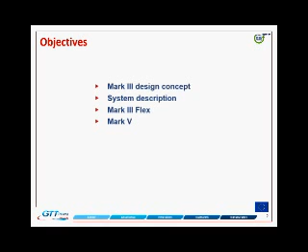A feature here, which will become more apparent in a minute, is the material of this primary membrane, often referred to as a waffle plate. Here's a piece of the primary membrane. In the Mark III system, the primary membrane is made of a particular grade of stainless steel, 304L, and you can see it has these folds or corrugations in it. You can probably guess the reason for those.

It's because when you cool that down to minus 160 degrees, it's going to contract. So to absorb that thermal contraction, the sheets of stainless steel are folded in this particular way, so that when we cool it down, all of the contraction is absorbed by these folds. The actual stress on the material itself is very low.

We've already seen that the membrane system has to have a secondary barrier. In the Mark III system, the secondary barrier is made not of stainless steel, but of a different material called triplex. Triplex is itself a kind of sandwich made up of aluminium foil in the middle, a very thin sheet, with glass cloth on the top and bottom. This is called triplex, and it acts as a secondary barrier. I'll show you where it's located in a moment.

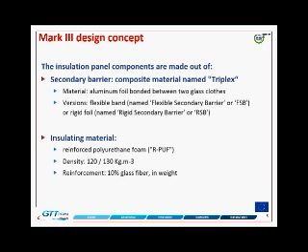The insulating material is reinforced polyurethane foam, often referred to as RPUF because it's easier to say. Now, because of the stresses, flexing and stressing on the hull we talked about earlier, if we just had blocks of polyurethane foam there's a good chance they'd crack as the hull flexes and stretches. So it's reinforced with glass fibre to prevent it from cracking.

This is a typical example of how it's put together. On top here is a piece of the insulation. The primary membrane would fit on top here, which I'll show more clearly in a moment. We have some polyurethane foam, then the grey layer is the secondary barrier, triplex, then more foam, and then a plywood sheet on top with stainless steel strips attached, which allows us to weld the stainless steel primary membrane onto that.

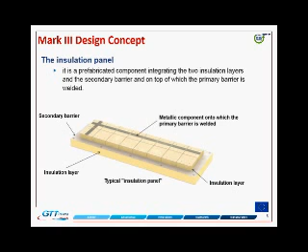Okay, I'm going to explain that in a bit more detail with some nice diagrams in just a moment.

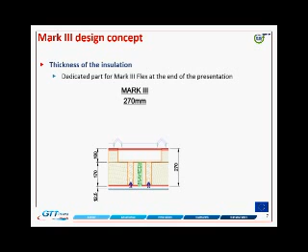Dimensionally, the thickness of this insulation system is about 270 millimeters. So here's your inner hull, here's the secondary insulation, which is about 170 millimeters thick, here's the primary insulation, about 100 millimeters thick, and then we've got the triplex secondary barrier at this point and the primary membrane on the top here.

With all of these containment systems, one of the key things from a manufacturing point of view is to make them as uniform as possible. We want as many standardized components as possible, because that keeps the cost down in terms of manufacturing and makes installation easier. If you're installing multiples of the same thing, it's easier to train people. If you have many different components to install, it becomes more difficult and more complex and expensive to install. So as much as possible, we minimize the elements that make up this system.

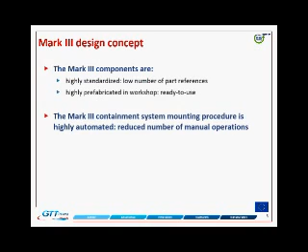And that's what I'm going to show you now, some of those elements. So the panels, which are used in what's called the flat wall area, all these flat surfaces in this tank, we refer to as the flat wall area, and they're made up of these panels. We can see the panel, you saw that just now.

Let's split it apart. So each panel is a sandwich, which has a plywood base, polyurethane foam, secondary insulation, 170 millimeters thick, a sheet of triplex, that's our secondary barrier in case the primary fails. Then we've got a thinner 100 mil thick piece of primary insulation, and once again a piece of plywood board on the top of that, which allows us to attach the primary membrane onto it.

So all of those components are bonded together with glue in a factory where it's manufactured, held under a certain pressure, certain temperature and humidity for a certain number of hours, and that is a panel. We use multiples of those panels in all of the flat areas in the tank.

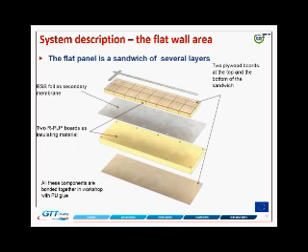So those are the elements there. In this diagram you can see these are all the flat panels. You see them on the bottom of the tank, on the transverse bulkhead at the fore and aft end of the tank, and on the chamfer wall here. They're all the same. I've forgotten the exact size of them now, doesn't matter. But those are the flat panels, okay? Get the idea?

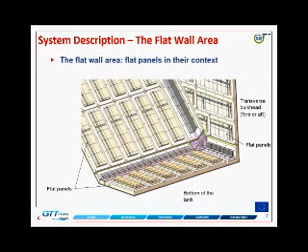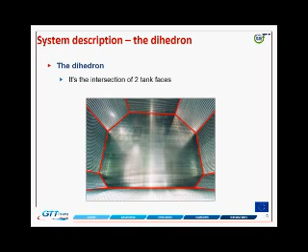Where we come to the joining between two of these flat surfaces, we refer to this as the dihedron. So we have some 90-degree angles here, and we have these angles on the chamfers. It depends on the exact design of the vessel, but it could be 135 degrees, which is pretty typical. But they can be any angle you like, you can make them anything you want, or they could be just rectangular. So this is the dihedron, this is where the corners are located.

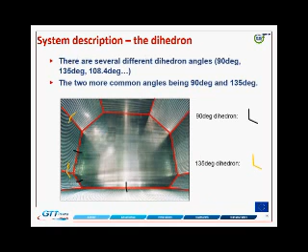So these panels are slightly different now, and I can split one of those apart so you can see how it's made up. Here you can see that we have a secondary insulation here, a plywood base behind there, and then we've got our triplex here. These are made up of two elements joined together, and of course there's a bit of a gap between there. So we have this piece of secondary membrane, which is then bonded onto there to cover the joint, and then we have the primary part, the primary insulation, which is slightly different. Instead of being lumps of polyurethane foam, it's got to be a little bit stronger, so we use blocks of plywood with 6mm thick stainless steel plates joining them together. Here you can see one of them. Okay, so that's what goes together in this bit here.

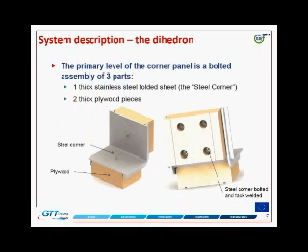So when we put it all together, those are the dihedrons which run along here and along here. Wherever we get two flat surfaces coming together, we have one of those.

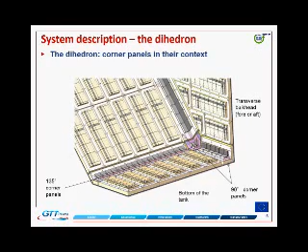Now, in these little corner pieces here, we actually have the joining of three flat surfaces together, and this is called a trihedron. Same sort of idea, but slightly different construction. So now there are 1, 2, 3 faces to this, and if we split it apart, again, it's not too difficult to see.

We've got polyurethane foam for the secondary barrier. We have 3 separate pieces of triplex here, and another piece folded to go across all of those. Because of the way that fold is, you'd end up with a sharp point, so there's a bit cut out, and a small scab stuck over it to complete the seal. Then we've got more pieces with plywood blocks and a stainless steel plate to give additional strength in the corner.

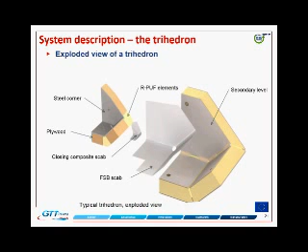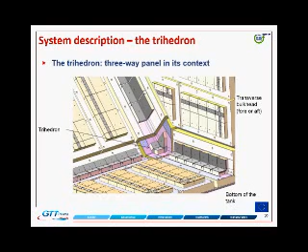That's where they're located, where the three faces join together. So those are the main components of that system. Now, when we put it together, there's a bit of a problem because we have gaps between the panels, and the secondary membrane itself has holes and gaps in it, so we've got to fill all those in as well.

So at the construction stage, when all of these elements are in place, we run strips of triplex across all of these joints, and they're all glued in place. As much as possible, all the long lengths are done by automatic machines. Using machines minimizes human error and increases the consistency of the quality. In the corners and areas where the machines can't get, people have to do that, and the guys who do the manual bonding in the corners are very highly trained. They have to test all of these parts once they've been bonded down. They go around with a vacuum box, and there are several tests carried out.

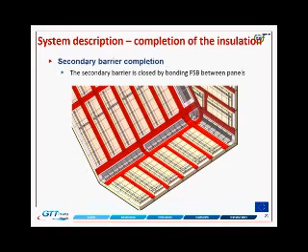If we go back a touch here, once we've glued all of these in place, there are still some gaps in the insulation between here, so we've got to fill in all of these gaps now to complete the insulation. That's where this bit comes in, referred to as a top bridge pad, and it fits in between all of those panels. We fit them all in so that we end up with a smooth surface. All the insulation is completed, and all we have left to do now is install the primary membrane onto the insulation system. So those are the elements that make up the system.

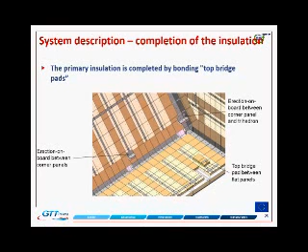So we've got our primary membrane, and then the insulation system beneath it. Part of that insulation system contains the triplex secondary membrane, and then we're in contact with the inner hull. The method of attaching those panels onto the hull, in this system, is physically bonded. They are glued onto the hull.

To glue them onto the hull, they use ropes of mastic, which do two things. One is to physically bond it to the hull, and the second is to spread the load onto the inner hull, because when you build a ship and great big blocks of the hull are put together, the surface of the steel is not nice and smooth and flat like that tabletop - it's a bit up and down, undulating. So the thickness of the mastic ropes underneath those panels varies to absorb the gap depending on the undulations of the steelwork. It fills the gap, as it were, and also transfers the load onto the hull as well as bonding it.

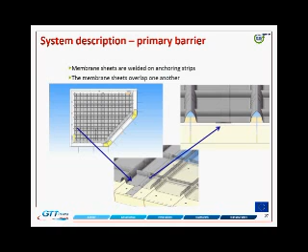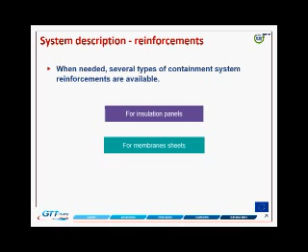Now, we mentioned earlier about reinforcements. For this system, you can reinforce the insulation panels, and or we can have some reinforcements for the actual primary membrane itself, depending on what we need for this particular vessel, given what the vessel's going to do and where she's going to work.

So as far as the insulation system is concerned, I mentioned the mastic ropes that fit underneath. It's a bit hard to make them out, but these are the mastic ropes underneath, so the inner hull would be here. For the insulation, what we can do is reduce the pitch at which these are located, so the more of them we put in, the greater the load bearing and the more reinforcement we've created.

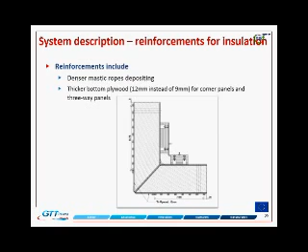As far as the primary membrane is concerned, there are two ways of reinforcing it. The corrugations, the folds in the primary membrane, can be strengthened by creating little ribs within them, giving greater structural strength to resist the motion of liquid moving around in the tank. If we need even more reinforcement, we can locate small plywood wedges underneath those corrugations, giving them greater resistance to pressures created by the liquid moving in the tank. So those are a couple of ways we can reinforce that system.

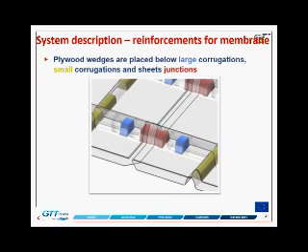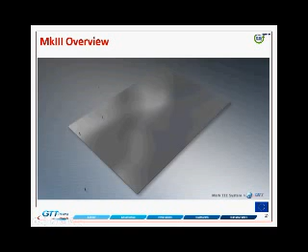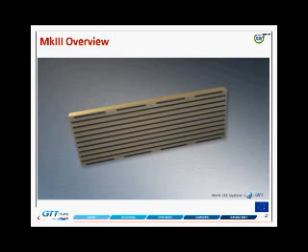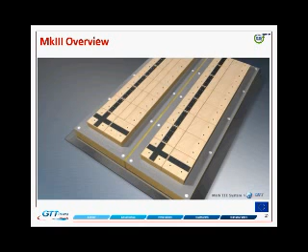Now, if this works, you will see a brief animation showing the way in which these come together. Here's the inner hull. There are some studs located on the hull to allow us to locate the flat panel. Here's the mastic ropes that go on the back of those panels, and there they go down onto the inner hull. We secure those down, then fill in the gap between. There's the triplex to close over the gap, so that completes our secondary membrane, secondary barrier. And here we're showing the reinforcements being put in, the reinforced wedges as well, and that would complete the membrane system.

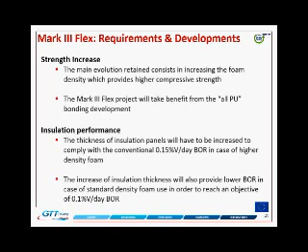So the way it worked out is they increased the density of the foam to give it additional strength. But because we'd given it additional density, we had to make it thicker to give the same boil-off rate. That was the strength option, which nobody's taken up—nobody wanted to do that, it turned out. Having increased the thickness of the insulation, what we could do then is keep the same foam density, so it's no stronger but it's thicker, meaning the insulation performance is better. So the boil-off rate reduced from 0.15% per day maximum guaranteed—in practice lower—down to 0.1% per day, and this is the option being used on the Mark III vessels constructed in the last couple of years.

So just to clarify, I showed you this diagram earlier. It showed the dimensions, and I said the total was 270 millimeters thick, with the secondary about 170 millimeters thick and the primary 100. So what's happened here is, again to make things as simple as possible manufacturing-wise, we've kept this bit the same, so that's still 100 millimeters thick.

This bit has increased from 170 to 300 millimeters thick. So you've increased the thickness of the insulation and therefore improved the insulation properties of that system.

What's the weight you have per meter? The density of the foam used here is about 120 kilograms per cubic meter. If you wanted the other option that no one's taken, the density of this foam was increased to give greater strength, but that was again the reason for having to make it thicker to still give you that same 0.15% boil-off rate. I'm not sure what the increased density was going to be actually.

Nobody's opted for that choice. All the ship owners have opted for going for the same density of foam with increased thickness to reduce the boil-off from 0.15 down to 0.1% per day. It's giving them a better insulation performance.

But the whole build-up of the first barrier, the second barrier, all these constructions, do you have any working figure as weight, kilograms per square meter for this? So like the panels themselves? Yeah, for the whole construction. The whole tank, well, that's hard to say because it depends how big the tank is.

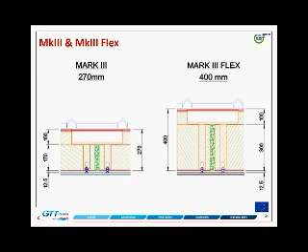So far we've talked about the Mark III design and this variation called the Mark III Flex. Now, there is something else that if you keep watching the newspapers and the shipping press, you will hear about in the not too distant future, but you heard it first here. There is a new design which GTT have developed, and it's currently going through approval processes with the classification societies now, and it's called the Mark V.

Now, your first question may be, what happened to Mark IV? Because we've jumped from Mark III to Mark V. Well, you may know, I didn't, but in Asian countries, the number 4 is an unlucky number, just like here in the West we consider 13 to be unlucky. So rather than upset anybody by naming it Mark IV, they diplomatically chose to call it Mark V. So that explains what happened to Mark IV.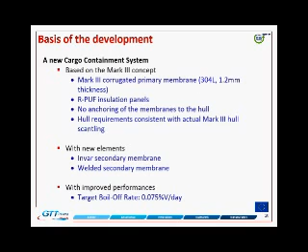Now, let's skip through to just look at the diagram. The original idea behind this was actually aimed at LNG fuel tanks, but it's now being developed for full-scale LNG carriers as well. Basically, we've taken the Mark III concept, so we've got the same polyurethane foam, the same stainless steel primary membrane, but the thing that's different here is we've replaced the triplex with a different material called Invar. So instead of gluing all of this triplex down, we're now going to use a metallic membrane which is welded.

So you could even argue that provides you with greater integrity because there's no bonding now, it's all welded. And so it's the same as the Mark III, except we've replaced the triplex with Invar.

Now, because Invar is going to shrink a little bit, there has to be some compensation for that. In this system, compensation is achieved with very small reverse corrugations in the Invar. It's a little bit like the stainless steel version, but with smaller corrugations, because Invar has a much smaller coefficient of thermal contraction than stainless steel does. So look out for that - you're going to start hearing more about it in the shipping press by the end of this year and into next year.

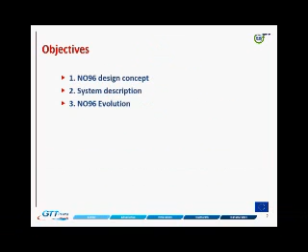Okay, so does that give you a reasonable idea about the Mark III system? So what I'm going to do now is give you a similar kind of overview, but for the NO system. I'll explain the NO system and at the end explain a recent development - if you keep watching the shipping press, you'll hear more about this development of the NO96 system.

So we'll start again with a nice picture. You've seen something like this already - this is the inside of the full-size LNG tank. Once again, you can make a fuel tank any shape you like, but here we have the standard prismatic shape and the pump tower at the aft end.

So the NO96 system follows the same basic principle of the membrane that we talked about earlier in the morning. But in this system, we have two metallic membranes, primary and secondary - in fact they're identical. And we have two layers of insulation, made up of plywood boxes filled with an insulating material. It's a little bit different.

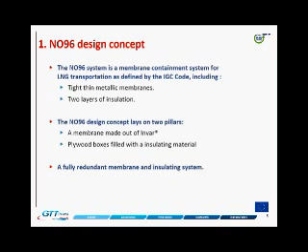Now, the primary and secondary membrane are made out of Invar, the same material I just mentioned in the Mark V. In this NO system, the Invar is laid out in strips or strakes, 500 millimeters wide, running the whole length of the tank. The edges of the Invar are just turned up a little bit at the edge, and I'm not sure if we see it in this presentation, but they're basically attached to the plywood boxes and welded together. There are no corrugations in this.

This is actually attached at the fore and aft end of the tank to the hull of the vessel, which is completely different to the Mark system. In the Mark system, there is no direct attachment of the membrane to the hull. But in the NO system, the membrane is directly attached to the hull, and I'll show you that in a moment.

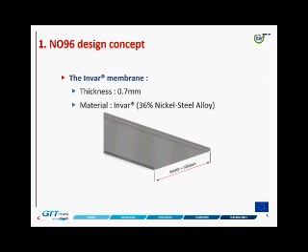So I mentioned that the insulating system here is very different. It was blocks of polyurethane foam in the Mark system, but in the NO system, it's made up of plywood boxes filled with an insulating material. Now these boxes, to make them strong, have internal bulkheads inside them, and they're filled with an insulating material.

Now up until about 2 or 3 years ago, the insulating material was always perlite. Perlite is like a volcanic rock - it's a bit like popcorn in the sense that the rock is heated up until it kind of explodes like popcorn, forms tiny little granules, and each granule has lots of little air holes within it. It's very light and has very good insulating properties, and it's coated with silicone, so if LNG or even water gets into it, it's not really affected. But that gave a boil-off rate of around about 0.15% per day.

So to reduce the boil-off rate in more recent years, they've replaced the perlite with glass wool, which is also very light and has slightly better insulating properties.

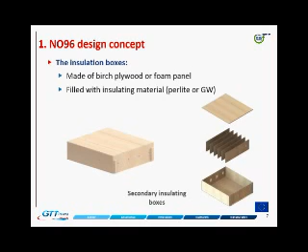So once again, we have a flat wall area, and then there's some other components that make up this system. Let's just have a quick look at the flat wall area. So a little bit like the Mark system, all these flat bits here we're referring to as a flat wall area. So here's how it looks.

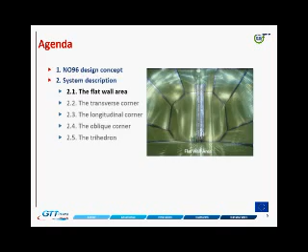If we took a cut through, here would be your inner hull, here is the secondary insulation box. You can see its internal division, and here it looks like it's filled with white perlite, but now it's glass wool. The box has a plywood lid, with little strips called tongues of invar, which slot into grooves in the top of the box, and that allows us to attach the strakes of invar, which are 500 millimeters wide, and they're all welded together to form a leak-tight secondary membrane.

When that's done, we pile more boxes on top again, and it's basically a repeat process — both the secondary and the primary are virtually identical. There's a few millimeters difference in the thickness of the secondary, but overall the total thickness of that insulating system is about 500 millimeters, more or less. So it's a little bit thicker than the Mark system. If you took two identical hull sizes and fitted one with the Mark system and one with the NO system, the one with the NO system has a slightly smaller cargo capacity.

You might notice that we have the internal bulkheads run in one direction on the secondary and the opposite direction on the primary. That's good for the structure, for the strength. Remember that all the weight of the liquid has to pass down through that structure and onto the inner hull, and once again we use mastic ropes here to transfer the load onto the inner hull. It's not very apparent, but those mastic ropes line up with all of those bulkheads inside the box, so all the load is transferred directly onto the inner hull.

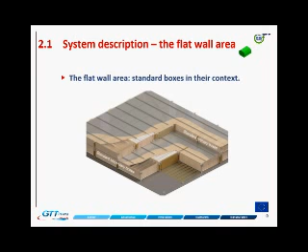So actually here you can see — this will be a very poor piece of steel work — but it gives you the impression that the steel of the inner hull is not flat. Here you can see how the mastic ropes fill the gap so that they're spreading the load from the box onto the inner hull.

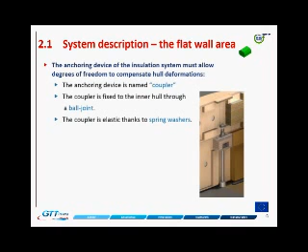So we talked about this earlier, about the pressure from the ballast water here. Because we're not going to glue the box onto the hull, we have to have some mechanism that both attaches the box to the hull but allows for that global and local deflection in the hull. The way we achieve that in the NO system is with this device called a coupler rod. The coupler rod starts at the bottom with a coupler base, which is welded onto the inner hull. Then we have this rod that fits inside, and this little arrangement here, which I'll show you in the next slide, has some spring washers which give it an elastic capability.

Let me see if I can show you. So first of all, here's the coupler base — remember, this bit's welded onto the inner hull. Now the first thing is, the coupler rod has a degree of articulation within that coupler base unit, so it can flex a little bit to the side. That helps absorb some of the movement.

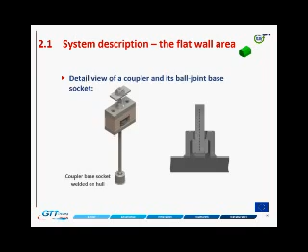As the hull flexes, particularly with ballast water movement, the hull gets pushed up between the stiffeners. In this diagram, watch what happens to the spring as the hull deflects between the stiffener. Imagine the ballast tank filling with water, slightly deflecting the hull structure. Let's wind it back and try again. You can see how that spring washer arrangement absorbs the movement of the hull, so our box remains attached to the hull but isn't subjected to exactly the stress the hull is exposed to.

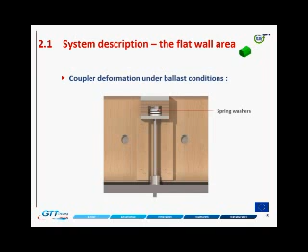On top of that, the strength requirements for the hull are greater for an NO vessel than for a Mark III vessel. Stiffness of the hull is slightly greater for an NO vessel than for a Mark III vessel, so the amount of steel work in the hull of an NO vessel is slightly greater than the Mark III vessel. Not a lot, but there's a little extra stiffening because of the limitations of the boxes.

Here we've got the box coupler, which is attached to the hull. This arrangement fits over what's referred to as the cleat on the edge of the box, basically pulling the box down onto the hull. The secondary membrane runs across the top, and there's an arrangement where we attach a small version of that coupler through the secondary membrane and into this main coupler. This is holding the primary box on, so the primary box is held by this piece, which is linked to the coupler and onto the inner hull. So that coupler doesn't just hold the secondary box on, it holds the primary box as well.

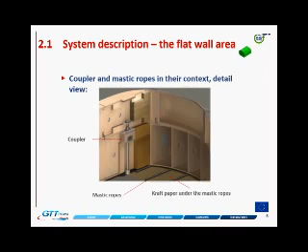So there we have it. You can see the arrangement, and when we install it, there are small gaps between the boxes, which we fill with insulating material as part of the construction process. Okay, so that's the boxes.

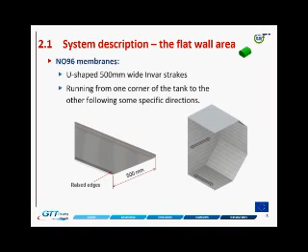The strips of INVAR we have here. INVAR has a very small coefficient of thermal contraction. In the longitudinal sense, the INVAR strips in this direction are attached to the hull of the ship, so when they shrink and contract, there's a certain pulling on the inner hull. I'll show you how that's attached in a moment. But in a transverse sense, across this way, the amount of shrinkage is quite small, so the edges where they're turned up here are capable of absorbing that amount of movement. You might see that in the slide in a moment.

This diagram shows how we attach the secondary barrier onto the plywood box. In the top of the plywood box, in the lid, you can see this T-shaped groove cut in, and there's this little L-shaped piece of INVAR which slides into that groove, referred to as a tongue. Each side of the tongue, we have our strakes of INVAR, and these are all welded together in a continuous seam welding, so we get a leak-tight barrier - that's the mechanical attachment of the membrane onto the secondary boxes. In fact, in this case, the primary boxes sit on top of that as well, so they also help keep it in place.

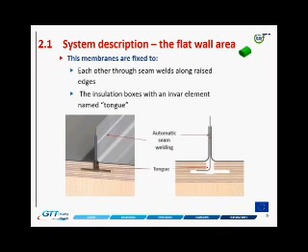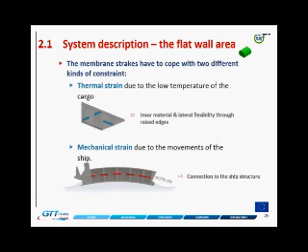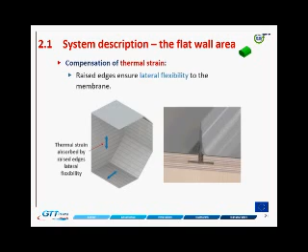So I mentioned the way we attach the membrane to the hull - in the transverse sense, the little turned up edges of these strips are capable of absorbing the thermal contraction, and this little animation shows that quite nicely. As we cool the membrane down in a transverse sense, because the shrinkage of this material is so small, that little bit of flexing permissible here is sufficient to absorb transverse thermal contraction. But in the longitudinal sense, we are actually attaching the membrane onto the hull, and in order to bridge the gap between the membrane and the hull, we use this piece here, called an INVAR tube. I'm going to show you another slide of that in a moment, which will show it a little more clearly.

Our secondary membrane comes along at this level and is attached onto the inner hull at this point with something called an anchor bar. The same thing happens at the primary level across here, and in the vertical sense it happens the same way. We've got the secondary and the primary. I think you'll see that more clearly in just a moment.

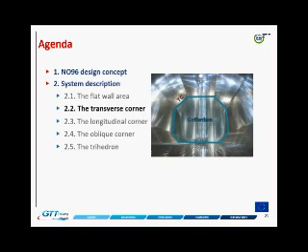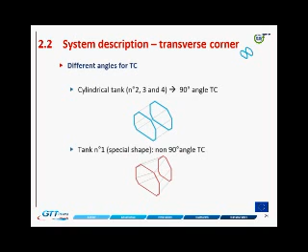This is what we refer to as the transverse corner, where two surfaces come together. Because of the shapes of the tanks, in tanks 2, 3 and 4 these will all be 90-degree angles. In tank 1, because of the shape of the forward part of the vessel, the angles are slightly different, but the concept is the same. The diagrams I'm going to show you show the 90-degree version - they're a little easier to visualize.

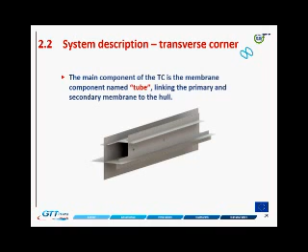Here is that Invar tube, which links the membrane onto the inner hull. Remember, this is only found at the forward and aft end of the tank. Side to side, we don't have to worry about it. So here is the diagram, I think it makes it a little bit more clear, I hope.

This is probably the easiest one to look at. Here is my cofferdam bulkhead at the aft end of the tank, and here's the inner hull, the bottom. These bits here are called anchor bars, welded onto the inner hull at these locations. I now fit my Invar tube wing into here, and these are insulation boxes that fill up the holes here. You can see the secondary membrane will come along here and be welded on at this point, and because this is welded onto the anchor bar, we now have a connection between the secondary membrane and the inner hull. The same happens here at the primary level.

If we look in the vertical sense, it's exactly the same - here we have the secondary, and here we have the primary. Now, something I didn't mention: these Invar strips, the strakes, are 0.7 of a millimetre thick, pretty thin. Also, with the Mark III system, the stainless steel plate is 1.2 millimetres.

I'm curious about the welding here because we have dissimilar materials. Are you using some components in the middle, some metallic components? No. How do you weld the two materials together? Right, okay, there's a part of that I can answer and a part that I can't.

The bit I can answer is the Invar tube is 1.5 millimetres thick, but it's made of Invar as well, so the connection from our strake onto here is simple because we're welding the same materials. The dissimilar bit comes from where we weld the Invar onto the anchor bar. The anchor bar is usually, in most shipyards, the same steel that we use for the bulkhead. The type and method of welding, I don't know, because again, I'm not an engineer. I can find out, but I can't answer that directly. But whatever it is, it's obviously acceptable for welding the two dissimilar types of metal. We don't use bimetallic strips or anything like that - it's just welding directly onto that.

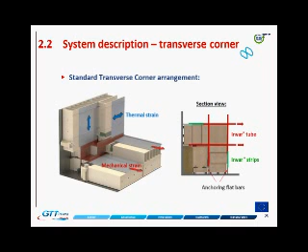So that covers the most complicated bit at the ends of the tanks, where we're attaching this onto the inner hull. At the sides, again, because the transverse stresses are basically only thermal, it's not such a problem.

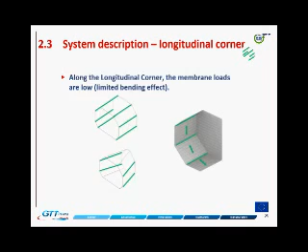Now we have two types here. We have tanks 2, 3 and 4, where the sides are parallel - it's pretty straightforward. In tank 1, it's a little more tricky because of the angle; we actually have a combination of longitudinal and transverse forces, so we have to have a slightly different solution there. But let's look at this one first because it's simpler, and then I'll show you the more complicated solution. So at these points on the side, this is the arrangement.

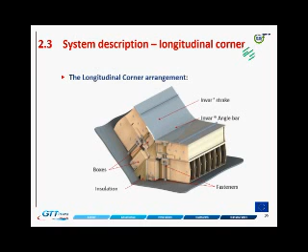We don't have any direct attachment of the membrane onto the hull, but we do have these boxes here. We've got boxes that come up to the angle, and we fill in the gaps with some small boxes and pieces of insulation. To provide continuity of the membrane, we have a small angle piece of Invar attached to the insulation, and then our strips of Invar weld directly onto those. So it's relatively straightforward - remember, in the transverse sense, the only stress is thermal. It's not a big deal.

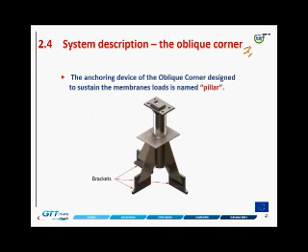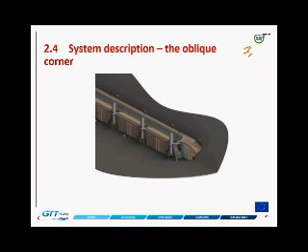In tank number 1, where we have the angles, because of this combination of longitudinal and transverse stresses, we have a slightly different solution, referred to as a pillar, attached to the bottom, to the inner hull. A little diagram here shows the build-up. We've got a similar arrangement to what you've just seen, but these are attached to these pillars, so they cope with the longitudinal stresses. So there's the secondary boxes in place, the secondary membrane, the primary boxes going in, and then the primary membrane on top of that. That solution deals with the combination of transverse and longitudinal stresses found in the forward tank.

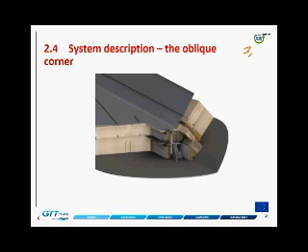In the corners, where three surfaces meet together, it's like that tube wing I just showed you, but with an angle to it - it's called a trihedron. It's like the tube you saw just now, but angled to cope with the change of direction there. It's complicated to construct actually, but simple to understand and see how it fits. And once again, there's a very short animation of about 30 seconds to show you how that's put together.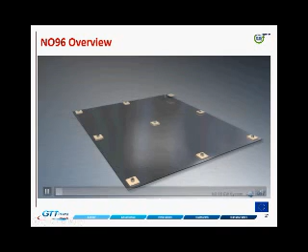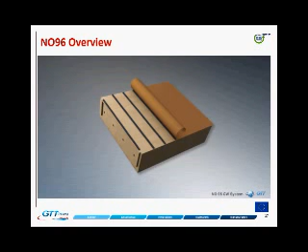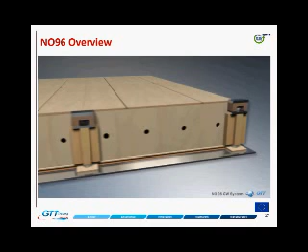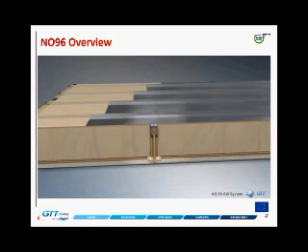That's the gaps filled in, and then we're going to slide in the tongues, the Invar tongues, into the plywood box, then the strips of Invar. So that's our secondary boxes and secondary membrane. And now we're going to fit the primary boxes on top of that.

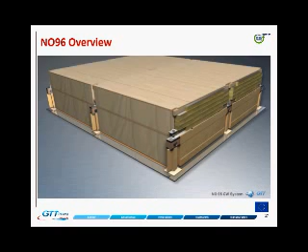And then we're going to do a similar thing - we're going to put another tongue. There's a slightly different arrangement, but another tongue of Invar goes in. That's just showing a couple of rods. So another tongue of Invar will go in, and then the primary membrane goes on top of that.

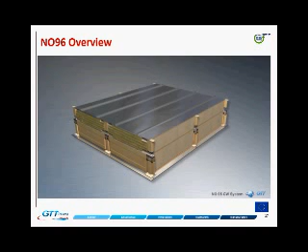Okay, so very brief, but it gives you a little overview. Oh, here this is showing the insulation being filled with glass wool rather than the perlite.

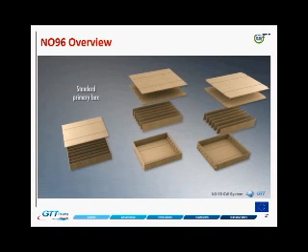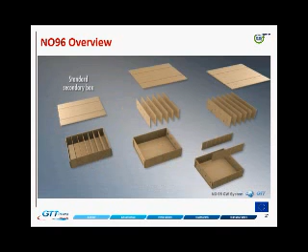And this is one of the options for reinforcing this system. We can fit double tops to the boxes, we can increase the thickness of these internal bulkheads - there's a variety of ways we can reinforce these boxes if we need to. But remember, every time you reinforce it, you reduce the thermal efficiency because you're putting more material in there. So you only reinforce where you need to. Yeah, that's the NO96 system.

Very quickly, I've got a couple of slides left just to show you the evolution of that NO96 system, which is being referred to or called the NO96 Max. So again, look out for this - you'll see and hear more about this in the near future in the shipping press. So let me just try and show you here.

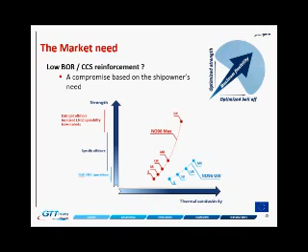So how do they do that? Well, basically what they've done is taken the plywood box concept but scrapped the vertical bulkheads you saw in the boxes, because if you apply sufficient force to that box, it can collapse the bulkhead. So what they've done is replace the bulkheads with pillars. Pillars are much stronger structurally. They've selected a particular material - it's not the same plywood, it's a different type of material, but it gives a massive increase in strength. And as I'll show you, it has a slight advantage in another way.

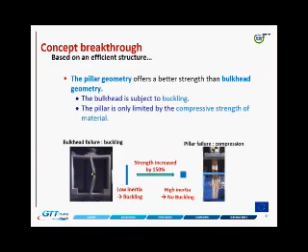This diagram shows you - think of the box you've just seen, but take away the sides of the box and the bulkheads in the middle and replace them with a series of pillars. So you're getting a stronger structure, but still with greater insulation performance. And the reason for the greater insulation performance is because there's less material in here - about 10% of that box structure was the bulkheads, was the plywood, so that's all channels for heat transfer to go through.

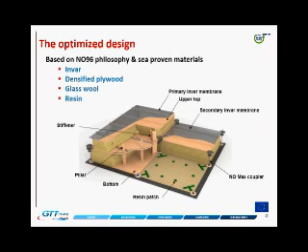So if we look at this, with the old box style, 10% of the volume of the box was the material. Now if we switch to this pillar arrangement, we can reduce that from 10% to 3%, which greatly improves the thermal conductivity, and at the same time is actually structurally stronger than that original bulkhead design.

Now you have another option with this as well. If strength is the main criteria you're after, what we could do is put more pillars in, so we end up with the same percentage of material as the original design. So thermal conductivity is about the same as this one, but strength is much, much greater. So again, as the ship owner, you can choose which of these two options is going to be most suitable for the vessel you want to build and the purpose you want it to serve.

So that's called the NO96 Max. This particular system is also still going through approval from classification societies. But by I think 2017, they hope to start building the first vessel using this system. So if you look out in the press and the shipping press, you'll probably hear of this system used in the not too distant future. But once again, you heard it first here.

Unfortunately, as I said, that didn't allow me time to go through the actual construction stages in the shipyards for these two systems. But to be honest, that's probably more than what you needed. Just having an idea of the concept, of what it's made up of, is hopefully good enough.